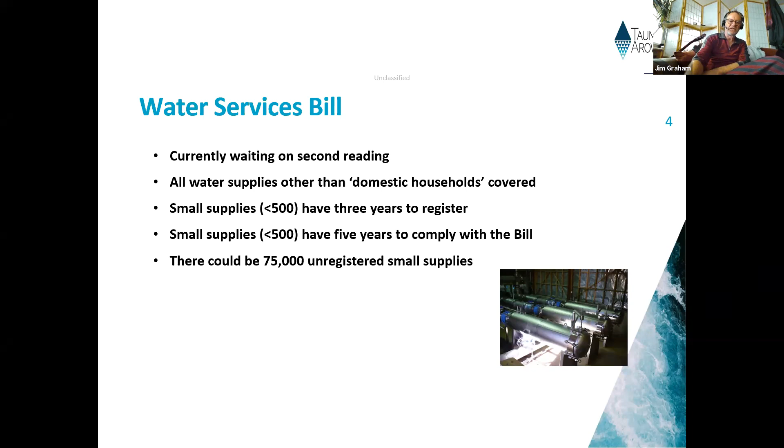But the bill as it's currently written says that small supplies, that's under 500, will have 3 years to register with us and 5 years to comply with the requirements in the bill. And as I said, there could be more than 75,000 supplies to be registered.

What we have done is we've set up a category system for water supplies, and it has 6 parts to it. On-demand network supplies, trickle feed supplies. So that's like often rural supplies that receive an agreed quantity of water over a 24-hour period.

Self-supply buildings where there's no network. Water carriers, so that's the trucking of water around the place. Planned event, temporary drinking water supplies, so music festivals, the like.

So community drinking water stations are where you have a place that provides drinking water that people fill containers from. And those circumstances are becoming more and more common in New Zealand.

Water carrier supplies are very similar, and what they are is where a water carrier has their own bore and fills the truck from their own bore. And so we've written rules for all of these categories.

The critical ones here are the on-demand, very small supplies, less than 50, and small supplies 50 to 500. And I want to talk a little bit about the rules that we've prepared for those supplies.

Now, those rules need to go to a public consultation process, which we will undertake when the Water Services Bill is passed and when Taumata Arowai takes over from the Ministry of Health as the official drinking water regulator.

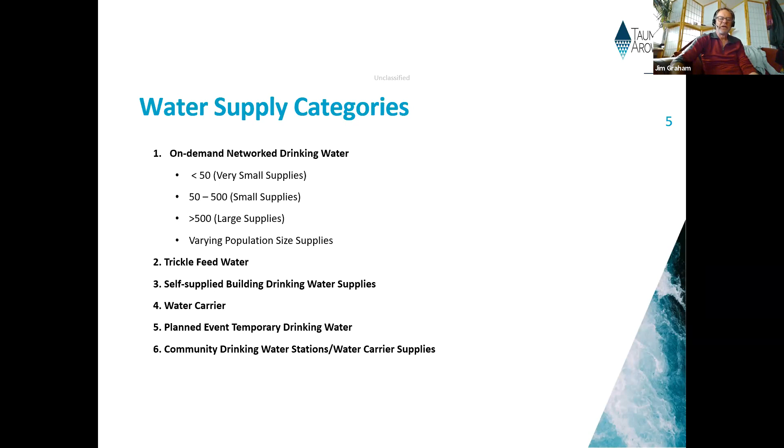And I'll just give you a little bit of a look at what they will be like. So this is the first time that we've had operational compliance rules for water supplies of this size.

So very small supplies. The rules for all supplies are broken into 3 groups: source water rules, treatment rules, and distribution system rules. Very small supplies are going to be required to test for a range of contaminants in source water.

And in New Zealand, there's been a lot of debate and discussion about source water contaminants and freshwater quality. That's a big issue, and particularly questions around nitrate and the role that nitrate plays in colorectal cancer.

And more recently, there's been debate and some research about preterm birth. So understanding the levels of nitrate in source water is very important for us. And so there's a requirement for very small suppliers to test for a range of contaminants, nitrates one,

iron, manganese, boron, arsenic, those kinds of things. So treatment, where a small supplier is using surface waters, they will be required to either have a backwashable filtration process, or some selective abstraction or a sedimentation process before any further treatment. And then all sources will be required to use cartridge filtration and UV disinfection. That's the treatment. The rules are written around those treatment processes.

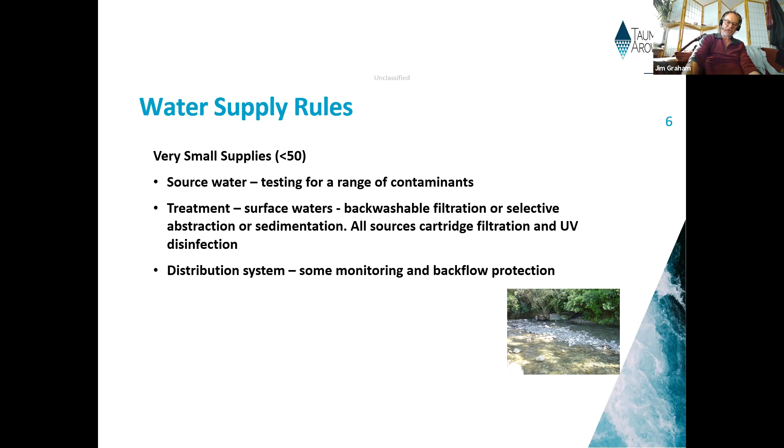And for distribution systems, there's some monitoring, not a heck of a lot, but there's some monitoring, bearing in mind these are very small supplies, and some requirements around backflow protection. In other words, where there's a risk of backflow, the water supplier will need to ensure that an appropriate device is installed. If we step up then to the next category of small supplies, which is 50 to 500s, very similar source water testing for a range of contaminants.

It's a little bit more comprehensive than the very small supplies, but again, it's similar sorts of things. Treatment, a requirement there that there's a filtration step, media, membrane, or cartridge, and we set turbidity limits for post filtration water. The water supplies must then have UV disinfection, and they must have chlorination. So those three treatment steps are required.

And then in the distribution systems, we'll be requiring some monitoring again for free chlorine, pH, turbidity, and backflow protection will be required. Additionally, there is going to be a requirement for testing for plumbo-solvent metals, and there's a range of them, but we've had some issues recently in New Zealand with high levels of lead being detected in distribution systems, and that's prompted us to set about rules for testing for plumbo-solvent metals.

So that's a very rapid and basic indication of where we're going. With that, I think I'll pass back to Tom, and I'll stop sharing, and the next presenter can take over. Thank you.

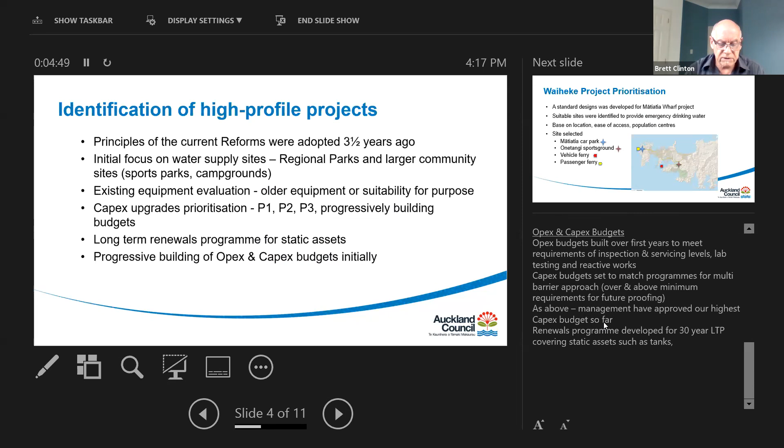So, moving on. Over to Pete. He's going to talk a bit about one of those projects in particular.

The main work originally came around some emergency work in response to a significant dry period in December '17, after we'd only just taken over the water supplies. The local board and the Auckland Public Health Service worked together with Healthy Waters to find a long-term solution, because on Waiheke there is no network supply. People are predominantly supplied by rainwater tanks, and when the rain doesn't come, they rely on 4 commercial tankering companies to bring water to them.

The format for actually getting water is you call all 4, ask them to deliver the water, and whichever one delivers it first, you take that and cancel the rest. So we had exceptionally long wait times, all of which we really struggled with to understand what the real problem was. And in turn, we ended up not being able to provide the most vulnerable members of our community with potable drinking water.

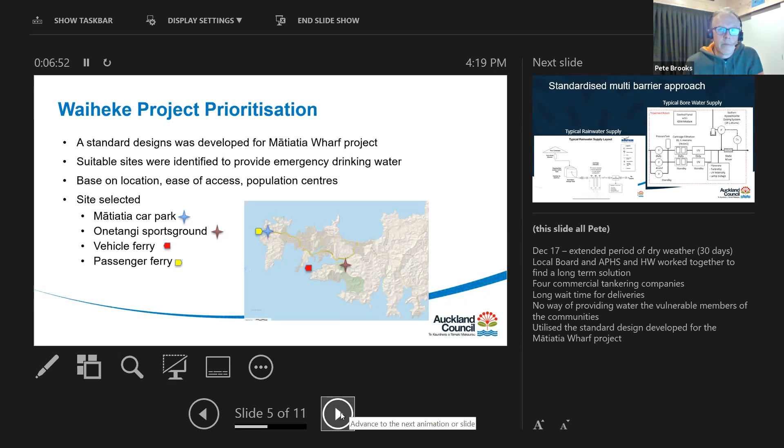What we actually did was take a standardized approach, and it's a multi-barrier approach. We have in the region two types of setup within our systems, and the first one is a typical rainwater supply where people collect water from the roof. We have a first flush diverter that is stored in raw water tanks.

Then it goes through the cartridge filtration of 20 and 1 micron. We did start with 5 microns as the first cut, but we found those became blinded very quickly, so we changed that to 20. This is a process of elimination, and my recommendation is learn from our mistakes. So we now have our standard of 20 microns and 1 micron that goes onto a UV disinfection unit and out to the users.

The similar treatment for the bore water supply. Again, we have a pump system to drive it, to lift it out of the ground. Same cartridge filtration system, a duty standby, depending on the numbers supplied by the area. Certainly the 2 sites on Waiheke had this setup, and we also included sodium hypochlorite, chlorine, before we actually put it into distribution.

This is in recognition of what we expected: a good multi-barrier solution with residual disinfection. We've worked hard to get this system right and come a long way. We have a hybrid of these two systems where we have bore water and rainwater supply in combination, and those sites also use sodium hypochlorite. We just have to watch the amount of organic matter coming off the roof supply, because chlorine and organics don't react well together. So that's a bit of background.

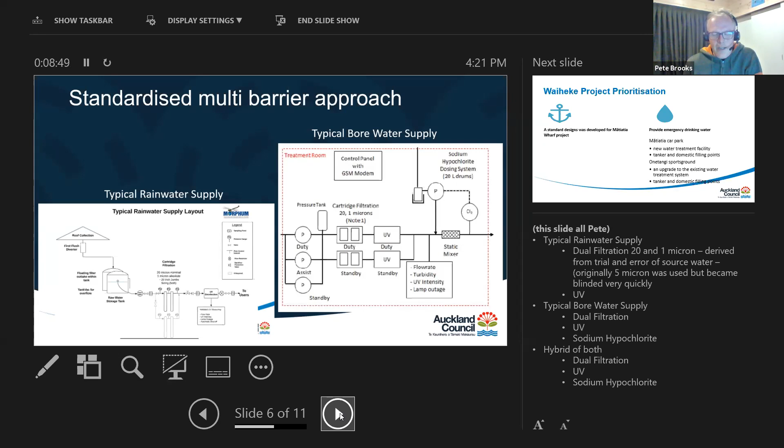What we did was use that standard design for Matiatia Wharf, which is the main ferry port, the passenger ferry port on Waiheke. We created a second treatment facility at that site with a brand new full treatment facility as described previously.

This included domestic and tanker filling points. These were really important to us because the tanker organizations weren't able to provide large quantities of water, up to around 10,000 litres, quickly enough, so we felt it was required to include those in our designs. At Onetangi Sports Ground, we needed to upgrade the existing water treatment system to cope, and that included tanker filling as well as the domestic filling point.

Just a point to note: we haven't actually used the tanker filling points as they were designed to do yet, and this is 3 years on. We have used the domestic fill points both summers, 2018 and 2019, but not the tanker filling points, because we've taken the real need for domestic supply so people can still get fresh drinking water if they absolutely need it. That has taken that need away, so it's just something to consider as you go forward.

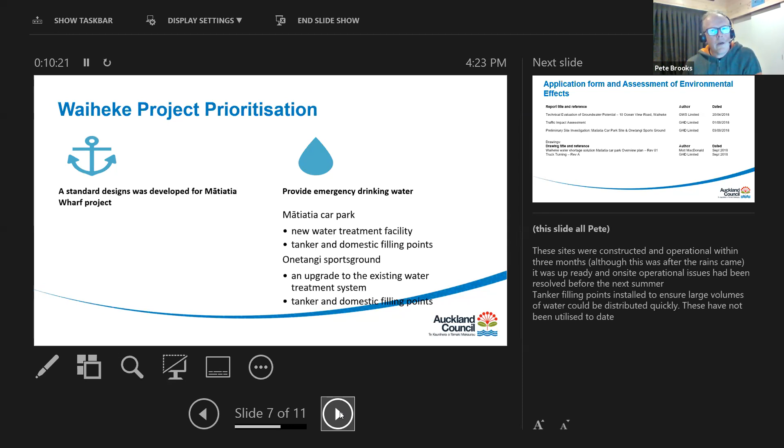To achieve the standing up of these sites in a relatively short space of time - I literally got the tap on the shoulder at a meeting in December '17, and by April 8, 2018, these sites were actually up and running.

To achieve this we did a lot of work in parallel, and the key was actually understanding the water quality coming from these two sites. We looked at 7 sites across Waiheke. With the investigation we completed, we found there was a real issue around the source water and making sure we could treat high volumes of it as we needed to, when we needed to.

For the assessment of environmental effects, which is part of our resource consent, we had a significant amount of work to do, and that was done really early in combination with everything else. The real key is understanding the chemistry and the constraints of the site, making sure you understand what you actually need to do.

And I'm going to hand back to Brett.

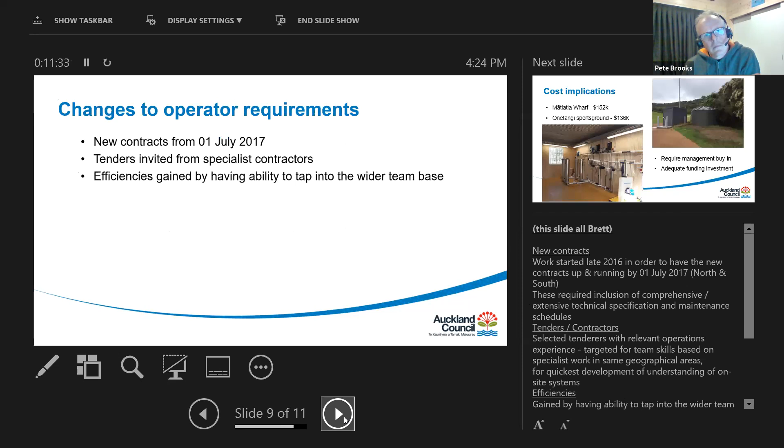Right, so part of the task we had was to get new contracts in place and make sure everything was going to go as we had planned. We split the Auckland region into two geographical areas, north west and south central, with comprehensive technical specifications and new operational maintenance schedules, and we went out to invited tenders.

We went to selected tenderers who we knew had the relevant water and wastewater experience, particularly those based in the areas already. Some of them had water or wastewater contracts, or both, with the big operator in the Auckland region, so we knew we'd have teams with a wide range of skills in the specialist area, able to mix in with other teams and tap into the wider team base. There was also the ability, if it had become necessary - which it has not - for one to potentially cover the other area in an emergency, or at least assist.

After that process, we took on Downer and City Care for those two areas. The contracts were set up as 4+2+2 contracts, so we've now just come to the end of the first 4-year period. Part of that was looking for efficiencies gained by the experience and the other teams they had working in those areas.

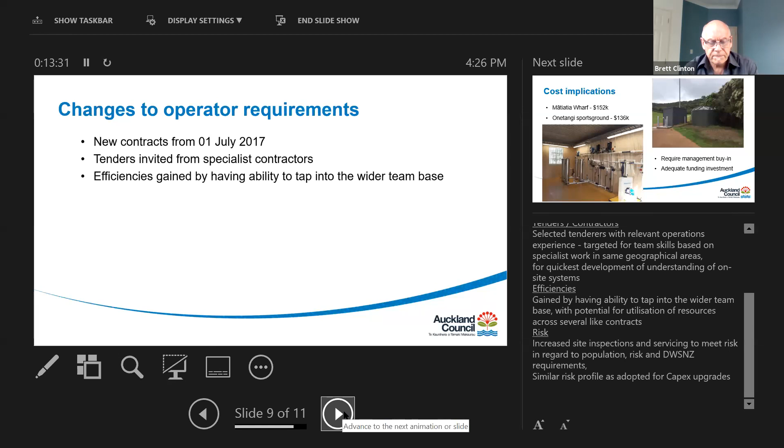So this gives you, coming back to the work we did on Waiheke, an idea of what these kind of treatment systems cost. The picture on the left is at Matiatia. What is now is all of that in this one site - we actually consolidated the 2 treatment systems that were there into one, so we got the cartridge filtration.

To the right, the top photo is at the Onetangi Sports Ground. You can see that's... no, it's the treated water tank, sorry, wrong way around. That's the treated water tank for post.

What we've been able to do is understand the cost. So the construction of this work was around, for Matiatia, 137,000 for the actual physical works. There was 10,000 of design, 3,000 of consent, and a couple of grand of project management.

Onetangi, because the Matiatia Wharf was a brand new system, don't forget. Onetangi, we actually upgraded the existing system, and there were aspects already there, so we used that to our advantage. So the construction work for Onetangi, sorry, my phone is ringing - the construction work for Onetangi was 124k.

The design was approximately 8, consent 2, and project management just over 1. What this really stresses is that you absolutely need to understand the reporting requirements of the system, and that actually requires senior management buy-in.

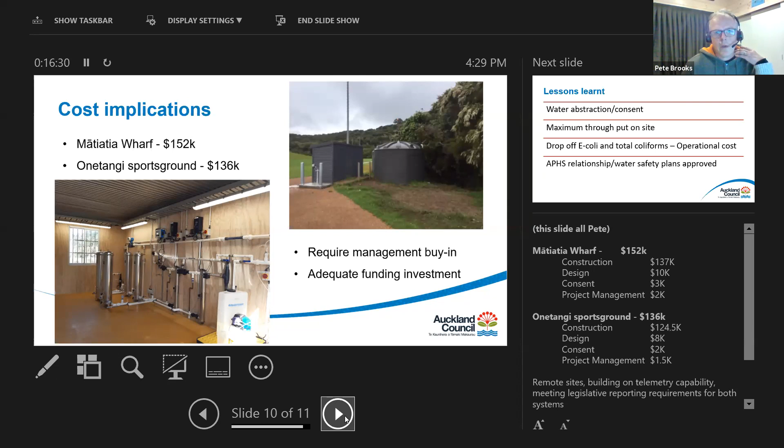And these sites will need maintenance and ongoing work going forward, so make sure you've got that longer term plan - we've been able to build that into our budgets going forward. Just moving to some lessons learned.

A key one for me is absolutely understand your abstraction and consent requirements. That information is fundamental to being able to do this stuff quickly and efficiently, because I'm guessing Taumata Arowai are going to be looking for that kind of response and meeting those regulations up to speed as soon as possible.

Over to you, Brett, about the E. coli and the total coliforms.

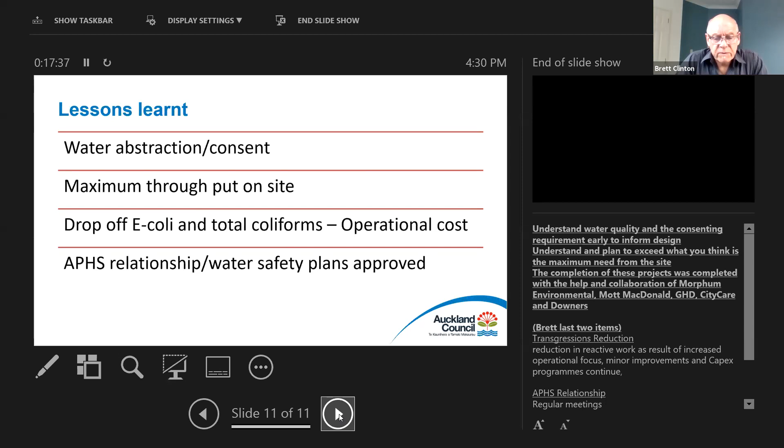Yeah, so what we've learned from this is that we've had a progressive reduction in the transgressions we've seen with water quality. The lab results have been coming in better and better, and that's led to a reduction in the operational cost in terms of reactive rechlorination of some of these sites.

Most of our bigger sites are chlorinated, so therefore we're not getting that follow-up work and the follow-on lab work that goes with that.

And so, as Peter says, the cost is something that shouldn't be overlooked. Both our OPEX and CAPEX programs have continued to go up in value each year, and this year we've had the biggest OPEX and CAPEX budget funding approved so far.

The other thing we've learned is it's key to have a really good relationship with the Auckland Regional Public Health Service. We started regular meetings with them right from the start, talking about water quality performance - obviously their key interest - but also sharing with them what we were doing in terms of our upgrades.

We've only got 2 networks. Matiatia is one of those, and we've got water safety plans approved at both of our network sites.

So it's important to have a good, open, honest relationship with the regulator. Our expectation is that going forward, all of the things we've discussed here will be continuing after the bill's passed.

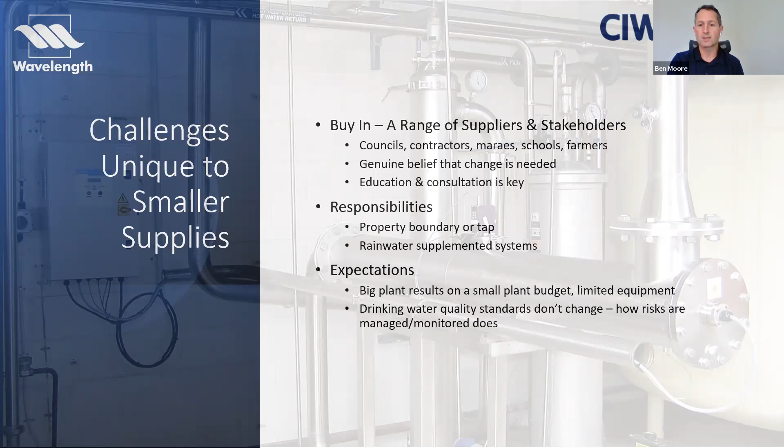Expectations: generally the source water quality of small water supplies is poorer to a degree, or at least more variable than that of large supplies. This sort of makes sense for a small supplier. We generally use the closest source available as opposed to being able to pipe a better source from further away. But the expectations are still the same. We still need to meet the drinking water quality standards. Although this has sort of always been the case, there's no doubt that the level of monitoring required is increasing to prove that standards are being met.

So we know that upgrades are coming as part of the reform, but where do we start? I know there'll be suppliers listening that have already made significant progress or are well ahead of the game, but these are some of the themes we've seen from a contractor's point of view.

We know that there's uncertainty around the timeline and finer detail of the reform, but we do know it's coming. So in our view, now is the time to prepare.

Documentation, drawings and data are key in planning an upgrade, and we see a wide range in the accuracy and existence of key information. Quite often there are drawings of the main plant at time of construction, but if small upgrades have happened since, these often aren't captured. We also find that the reticulation system is not so well documented. So now's the time to be surveying sites, verifying on-site to ensure drawings etc. are accurate.

Source and treated water quality results also seem like an obvious one, but often the results are only limited to the essentials. Depending on the water source, it's very helpful to have multiple tests showing seasonal variability, weather events, etc., to help build a more accurate picture and reduce the risk during design.

So once this information is gathered or verified, how do we start? There's the water safety plan process, which is absolutely essential. But if we can feed some early design work into it, we find that it makes developing the plan a lot easier.

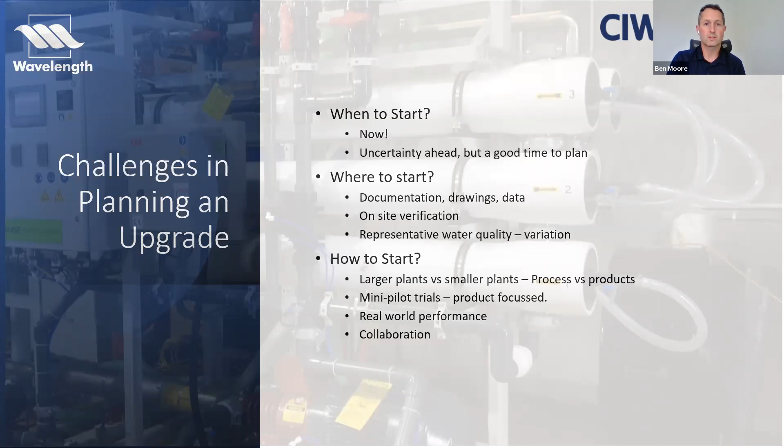So once we have a nice, shiny, compliant plant, the real challenge begins, and we need to ensure our plant remains compliant, providing safe water to our consumers.

Some of the challenge here goes back to buy-in from the people involved with the supply, especially on the small end of the scale, the very small suppliers. The majority of tasks required to maintain a small system are generally quite basic, and it can be seen as an easy job for caretakers and volunteers and the like.

However, the consequences of getting it wrong or missing something are obviously significant. Training helps, but these people also have other responsibilities, and expecting them to be a fully competent operator could be a bit of a stretch.

I think this proactive operational monitoring is where we see one of the largest challenges compared to water quality monitoring, which is essential but generally easier to plan.

Most of us would have heard of the multi-barrier approach when it comes to treatment process, but we also use the term multi-barrier maintenance, basically supporting each other and providing some overlap of duties to help ensure the system continues to perform as required.

Ease and clarity of reporting is also essential. The same sort of theme applies - we aren't often using seasoned and experienced water treatment pros at these sites. So having a robust, easy to use data collection and reporting system is key to being able to prove that the system is compliant.

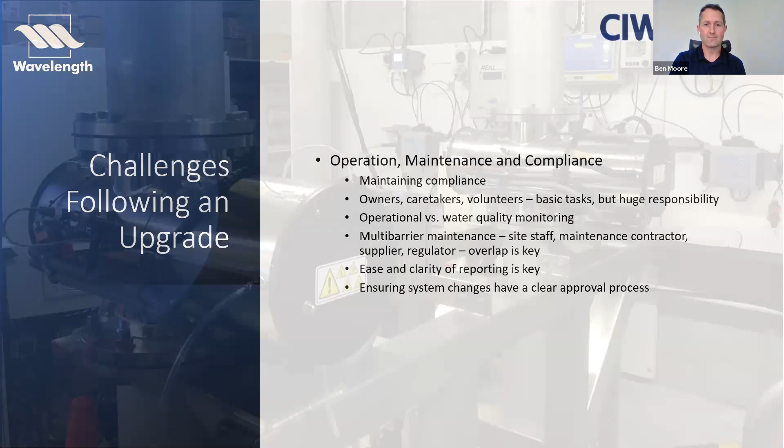With the number of supplies needing to be upgraded, we can't ignore the possibility of new technologies helping us out. We think that keeping it simple is the way to go. However, there are some adaptations on these simple technologies that can help.

Backwashable filters have been around forever. However, there are numerous valve heads, electric or the non-electric Kinetico for example, with different IoT connection options. The trick is selecting one that's robust and reliable.

There's also a huge range of filter media options available to put in these filters, a number of catalytic options for example, that we've put through a few further paces on some of the worst water that the Waikato has to offer, and even some media options down to 0.5 microns.

Ion exchange, again not new at all, but a great option for small supplies we think. In the right situation, they're far easier to operate with lower running costs, potentially than an oxidation filtration process.

The cartridge and UV combo needs a mention, as it's absolutely essential, but I don't think I need to go into any detail around that.

Lastly, chlorination, another essential tool, and in our view, on-site generation from salt actually makes a lot of sense for these small supplies, especially when you consider the people operating them may not be chemical handlers. These systems normally produce a hypochlorite solution, chlorine solution, less than 1% in strength, which is not classed as a hazardous substance like chlorine gas or full strength hypo. We need to manage the hydrogen gas produced, but that's managed through engineering controls. On-site generation essentially removes the chemical handling risks for the operator.